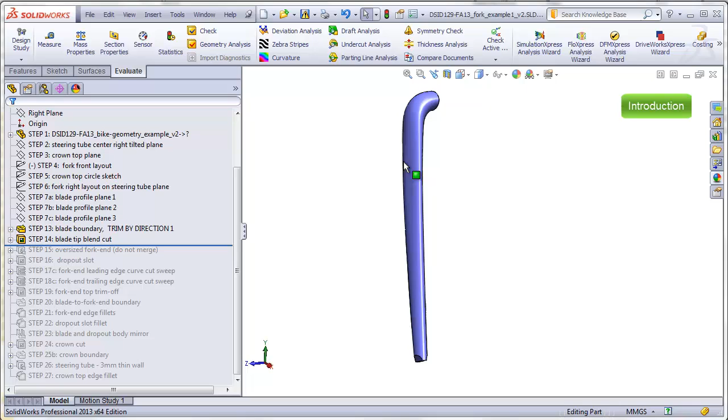At the end of part 5, we made it all the way to step 14, which gave us one blade made as a boundary and a trim at the bottom in order to allow us to add the fork dropout plate. In this video, I plan on finishing the entire fork by going through steps 15 through 27, which I'll just briefly walk through now.

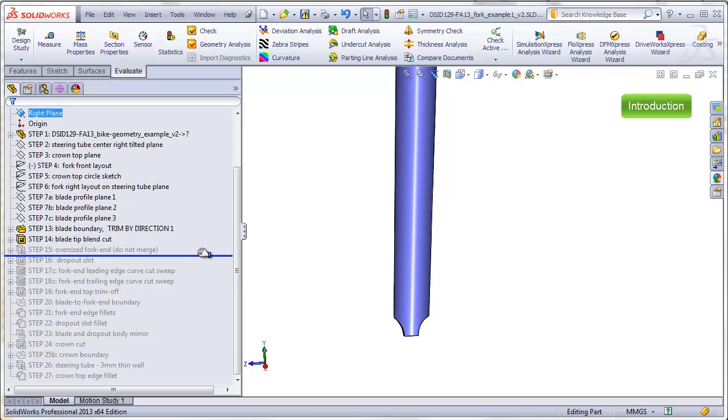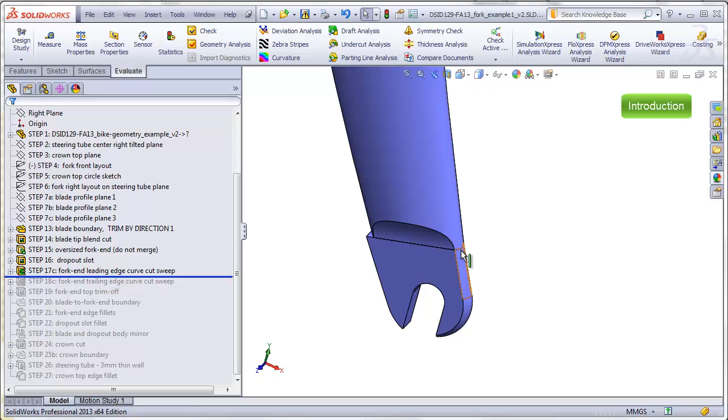Step 15 will be to add the actual dropout plate. We'll add it slightly oversized. We'll add the dropout slot itself. And then we're going to clean up the leading and trailing edge so that it matches the curvature of the blade. This will be done with a swept cut along the leading edge and a swept cut along the trailing edge.

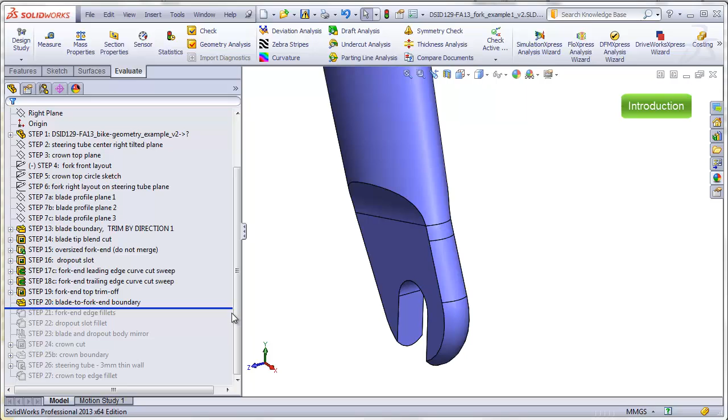These do not perfectly blend together yet, as we can see from the zebra stripes. So what we will do is cut out a little portion in between and then repatch this with a boundary that goes tangent to the surfaces above and below, giving us a nice blend.

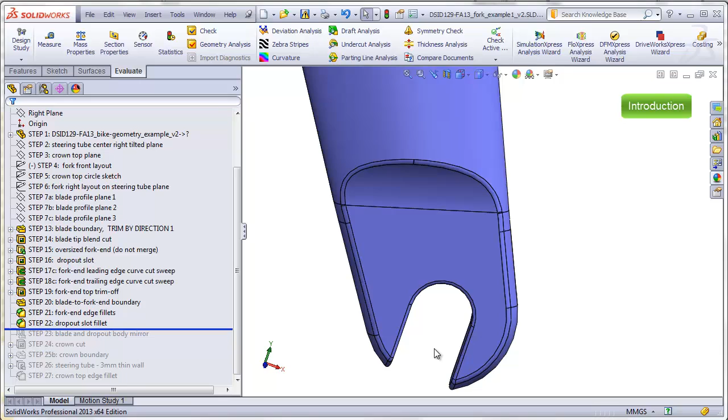We'll finish up the dropout with fillets along the edges and fillets along the dropout slot. That completes a blade with all the details for the dropout plate and slot, and we can finally mirror this entire assembly to the other side.

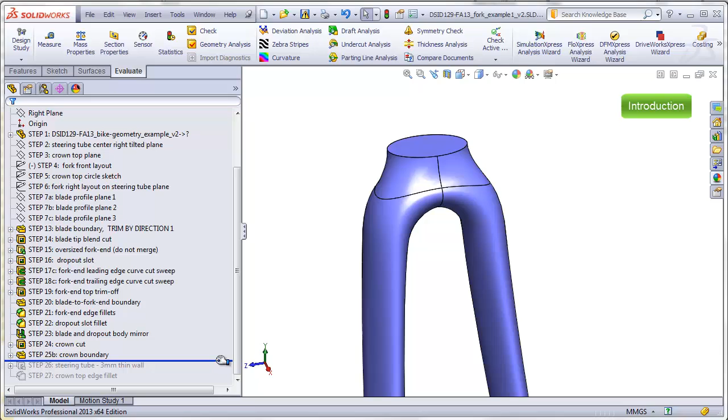Then it's time to add the crown. In this video, I'm going to cut the top of the blades off and then build a new boundary for the crown itself. Add the steering tube as a thin-walled extrusion, and then finish everything up with a fillet on the upper edge of the crown. So let's roll back to step 14 and then start constructing step 15.

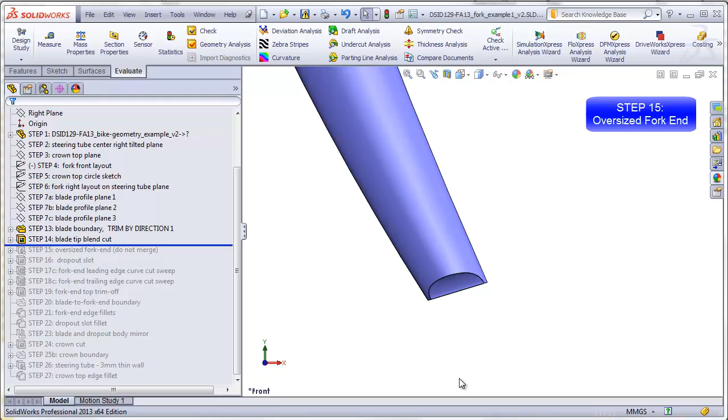What we are going to do is add our dropout plate, and we're going to add it a little bigger than it actually will be in the final design. I'm going to create a new sketch on my fork dropout plane, which is included in the inserted master file. So here's my fork dropout plane sketch, and I will make my front layout sketch visible.

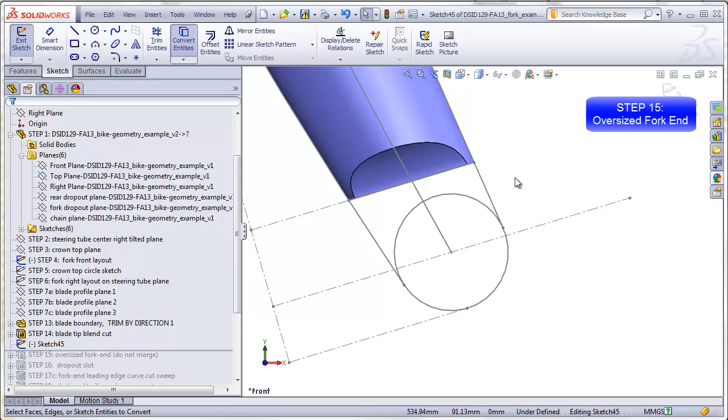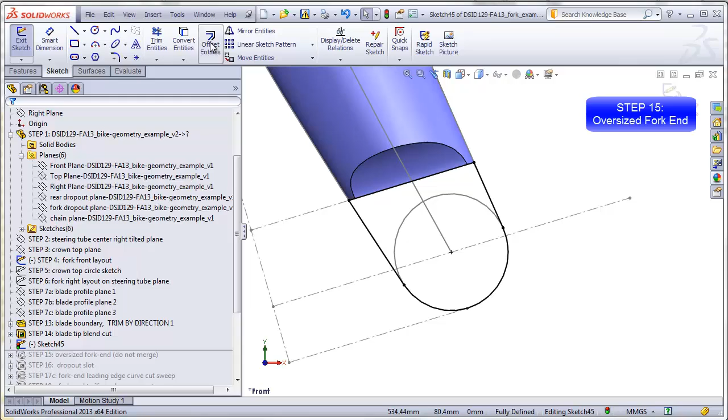What I want to do is copy these lines that represent the dropout plate using convert entities. And this one here. And we'll trim away the excess and this portion here. Now what I want to do is offset this edge a little bit to make the oversized dropout plate. So offsetting about 1 millimeter.

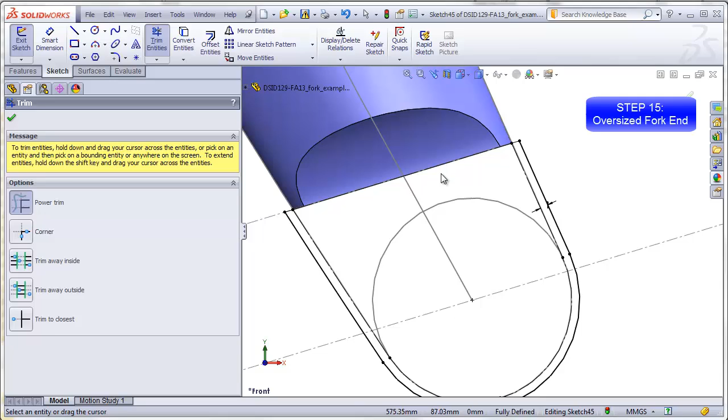I'll delete this line and I'll change all my original lines to construction, and I will extend this line out, trim this away, and actually this line should not have been construction, so I'll change that back to a solid line. So this will be the perimeter of my extrusion that will make the dropout plate.

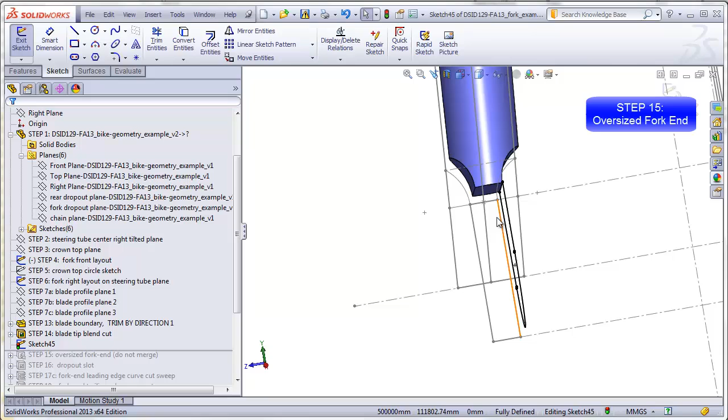I will also make my tilted sketch on the right tilted plane visible, so that I can see the thickness of my dropout plate. I can now do extrusion up to vertex. I can choose this vertex here, and that will give me a dropout plate that's exactly the width of the trimmed down portion of the blade. I'm going to leave this unmerged.

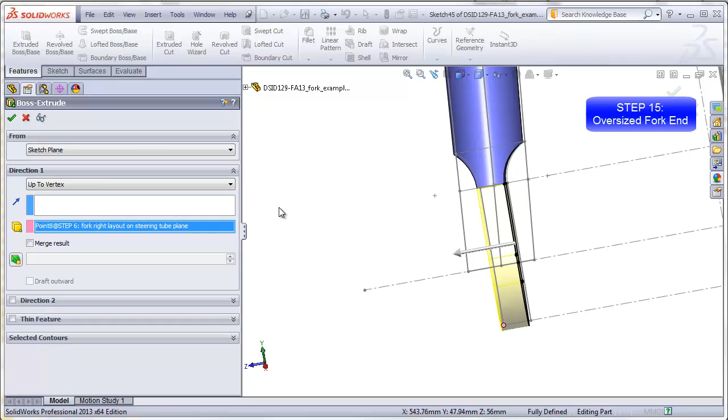The next step will be to add the dropout slot. In my sketches on the inserted master file, I have the fork dropout layout. I will make that visible. And once again, on my fork dropout plane, I'll make a new sketch. All I have to do is copy these lines that represent the slot and cut that out of the plate using convert entities.

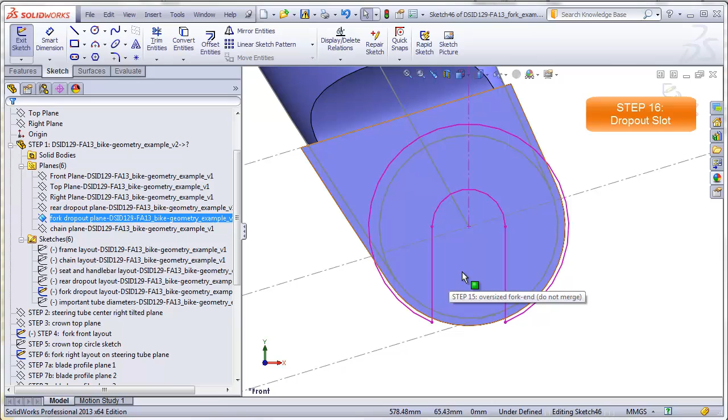Extruded cut, flip the direction, and make sure it's cutting through the correct body which will be this one here. And that completes the slot.

The next step is going to be to cut away this excess material along the edge of the dropout plate so that its contour, where it meets the blade, matches. I want to do that on the leading edge and on the trailing edge. This contour is probably not quite the same on the leading edge as it is on the trailing edge, so what I want to do is two separate swept cuts, each one starting at the top of the plate and finishing right in the open slot.

I don't want to do one single swept cut wrapping around the bottom and coming up to the top because it's almost guaranteed that it won't properly match the trailing edge of the blade. The first step in this process is going to be to make the sweep path.

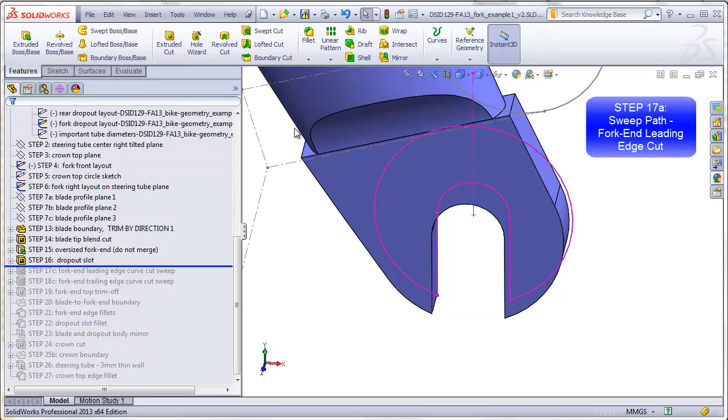So sketching once again the fork dropout plane, I'm going to copy these lines and this line to create a sweep path. Using convert entities, I'll copy this, this, and this. And I will add a construction line going from the center downward.

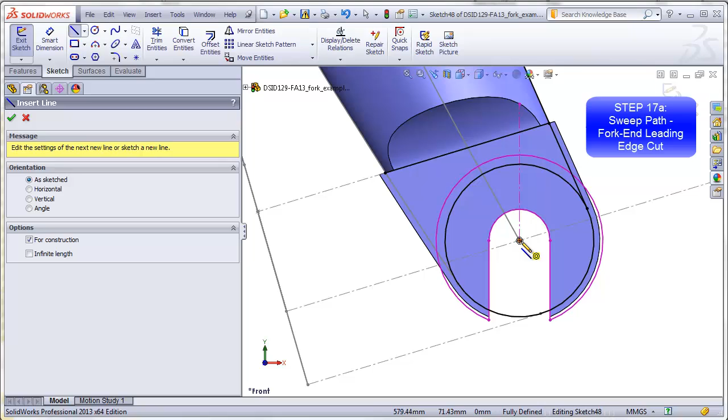And I will trim accordingly, getting rid of this excess here and this portion here. This portion I'll just make a construction line. So now I have a sweep path that starts at the top of the plate, wraps down around, and finishes right in the middle of the slot. Closing that sketch.

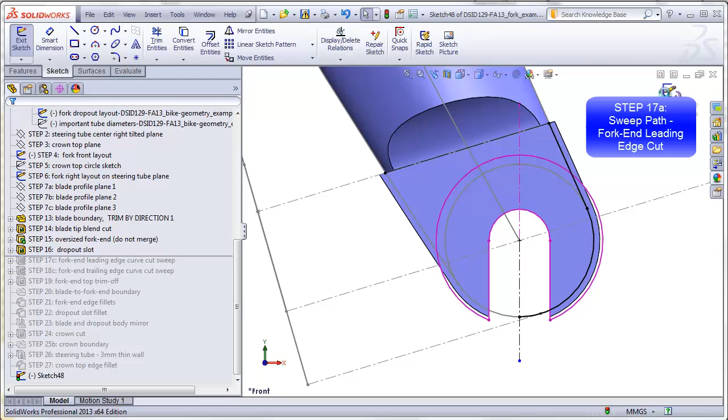It's time to draw the profile that will be swept, and I'll draw that on the top of the plate. What I want to do is copy this curved edge, and I will also copy this edge of the plate and this edge.

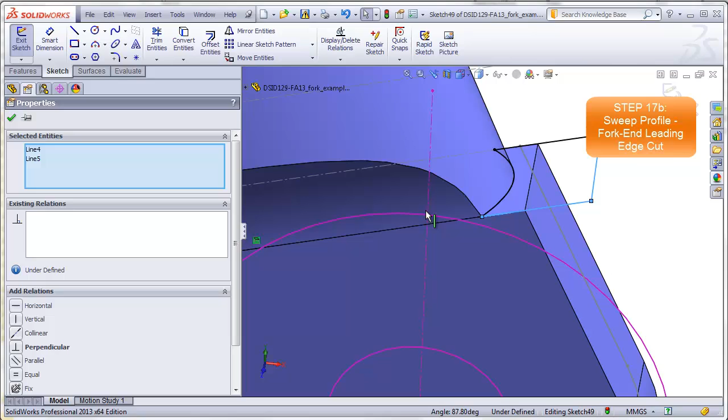Trim the excess. Looks like I didn't get this one here. Trim the excess, and I'll drag this out just a little bit and finish this enclosed area. Make these perpendicular. We see what's happening here is this is the widest point of the blade.

By adding a little extra to the dropout plate, I'm guaranteeing that this profile, which is going to be swept around this area, will always be cutting into material. If I didn't oversize this plate, it's possible that this widest point, when trying to cut the widest point of the plate, would sometimes not give us a clean cut, and we would get a less than desirable result. Here we are guaranteeing that we are always cutting into material by making this a little bit oversized. So I'm going to add a dimension to this side here.

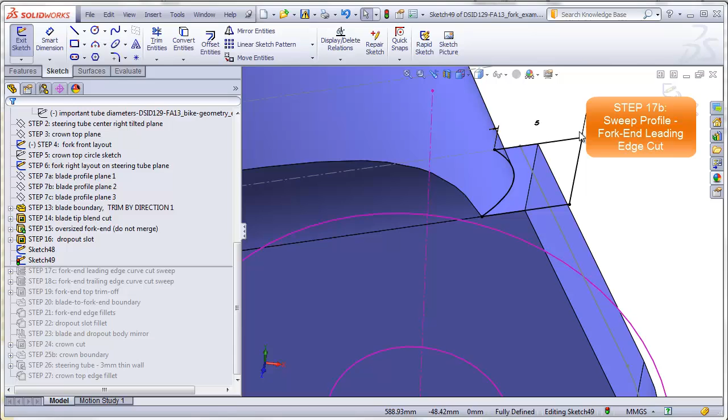Make that about 5 millimeters. The dimension isn't too important as long as it's not too large. If it's too large and you have a sweep path that curves inward before curving outward, the profile can end up crossing over itself and causing an error. So keep this down between 3 and 5 millimeters. So we'll finish that profile.

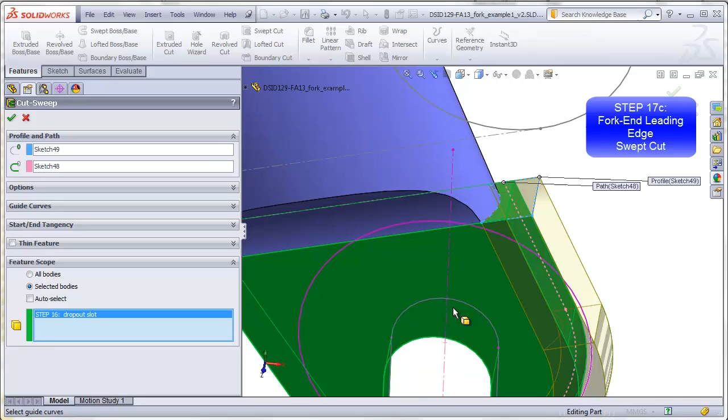We have our two sketches that we can make a swept cut. Going to Features, Swept Cut, choose our profile, our path. We want to make sure that this is the body that is cut. You can see in the highlight that this is ending right in the middle of the slot, so it won't be cutting any of the trailing edge.

And there's our finished cut. We can see that this matches up right at this edge. That completes step 17.

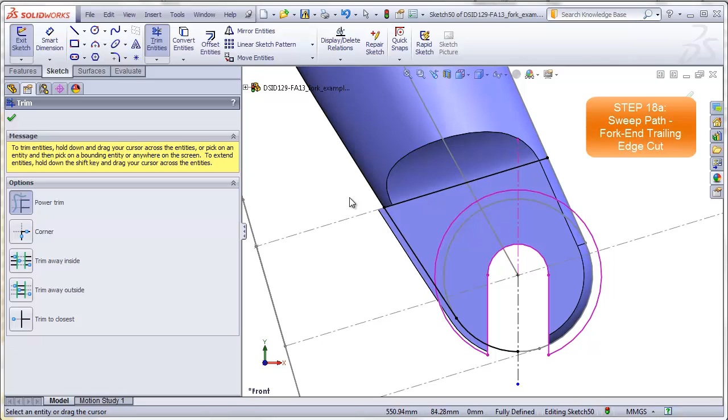For step 18, we will repeat the process for the trailing edge. So once again, making a new sketch on the fork dropout plane, I'm going to copy this line and this line using convert entities, and drawing a vertical center line from the center of the axle. That allows me to trim back this excess so that this path ends here, and trim away this excess here. Convert this to a construction line, and this gives us our path.

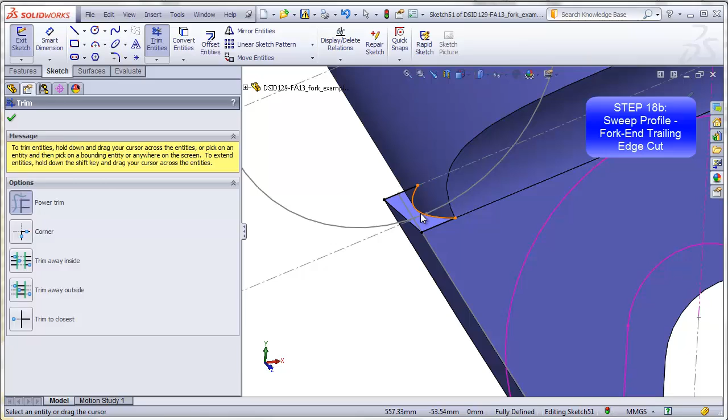To make the profile, we will sketch on the top of the plate, copy this edge using Convert Entities, and also copy these two edges. Trim away the excess so these lines end at these corners. Drag this out a little bit. Finish the enclosed area.

And make these perpendicular and add about a 5 millimeter dimension to this line. Finish the sketch.

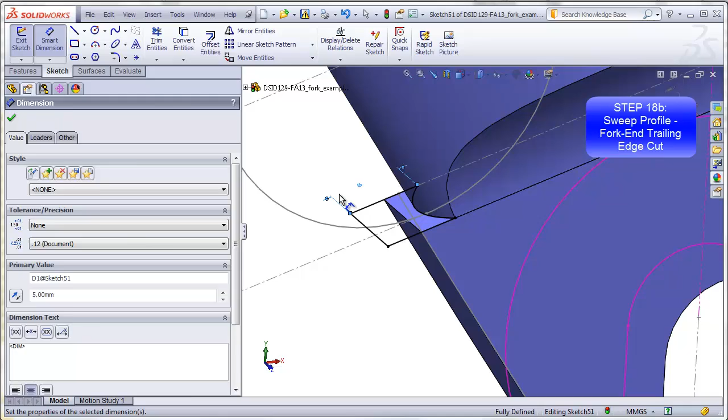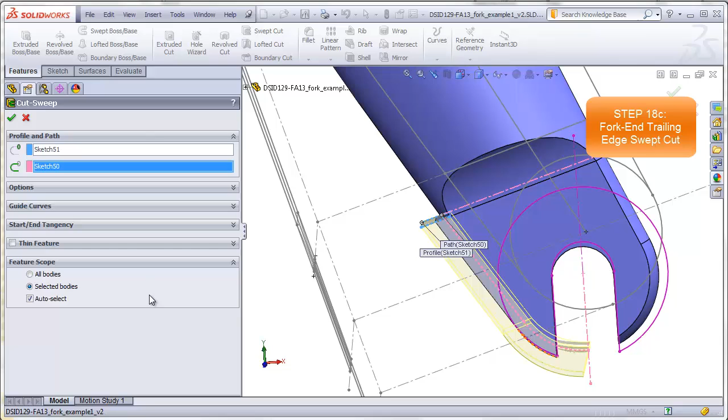Now we can do the swept cut once again. Choosing this as our profile, this is our path. You see once again it's going to end around the middle of the slot, and we will choose the plate in our feature scope. And we've just completed step 18.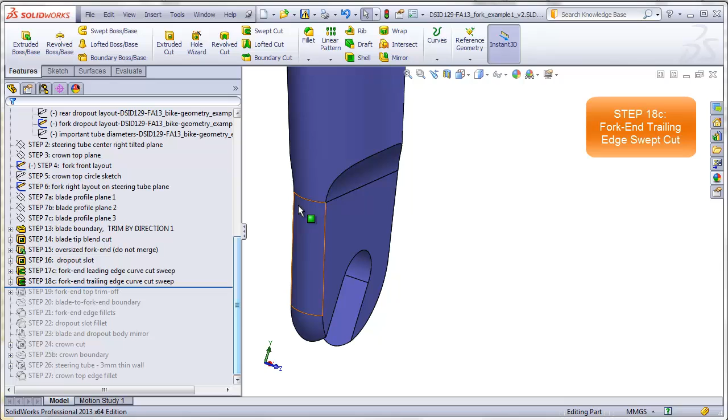So here we can see how this contour blends into the leading edge of the blade. This contour blends into the trailing edge. If we turn on our zebra stripes, we see that even though these match up, they aren't tangent to each other, so this isn't a nice smooth blend.

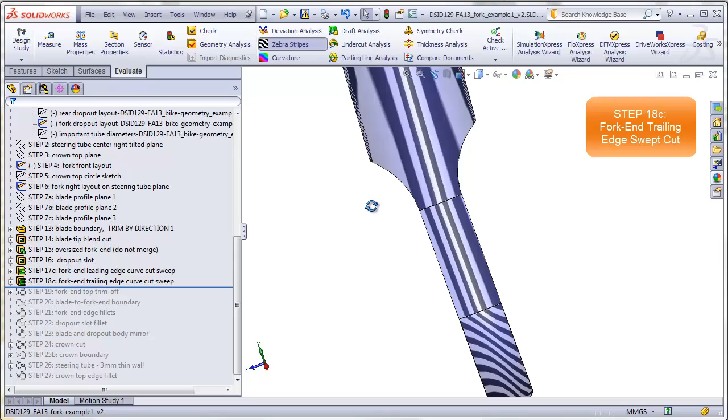The reason for that is that the plate is going straight up and down, but the blade immediately changes directions and is angling inward. What we're going to do is cheat a little bit, take out a little piece of the plate, and then blend it back together using a boundary. Making my sketches visible again, and once again drawing on the dropout plane.

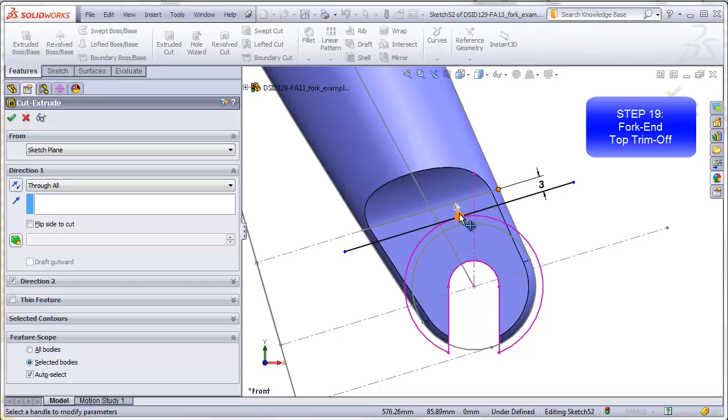I will draw a line that is parallel to this line sketched in the layout sketch, and I will make that about 3 millimeters. We're going to cut the top 3 millimeters off of the dropout plate. Extruded cut, make sure it's going this way. Select the plate, and that creates a gap between the plate and the end of the blade.

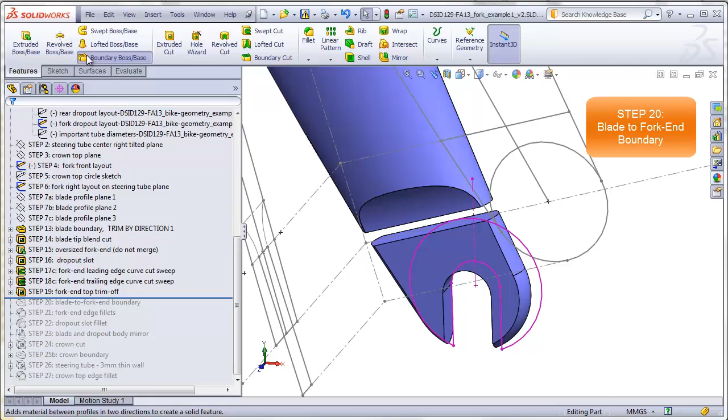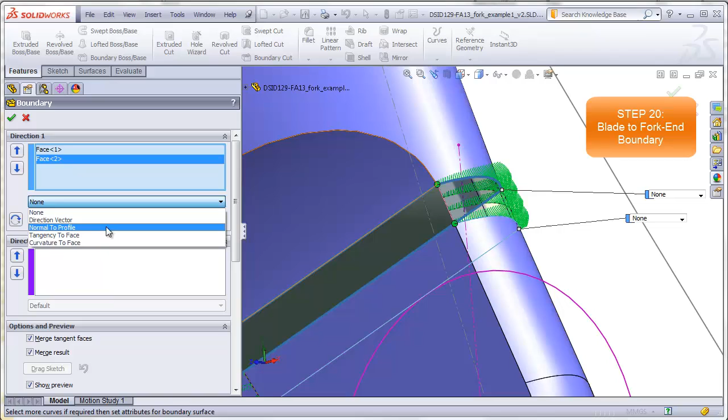Step 20 is to build a bridge now that spans this gap using our boundary. We'll click on this face, I'll do it near this corner. And I will click on this face and try to click near this same analogous corner so that these link up properly when I make the boundary. What I want to do is set both faces to tangency to face. What that will do is make all of these outside surfaces of the boundary tangent to all the surrounding surfaces that it connects to.

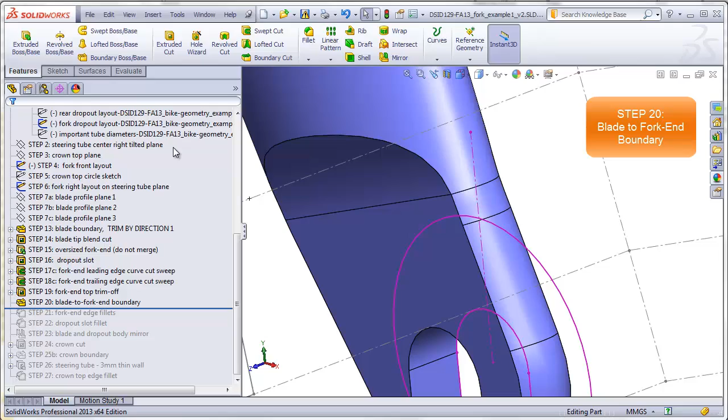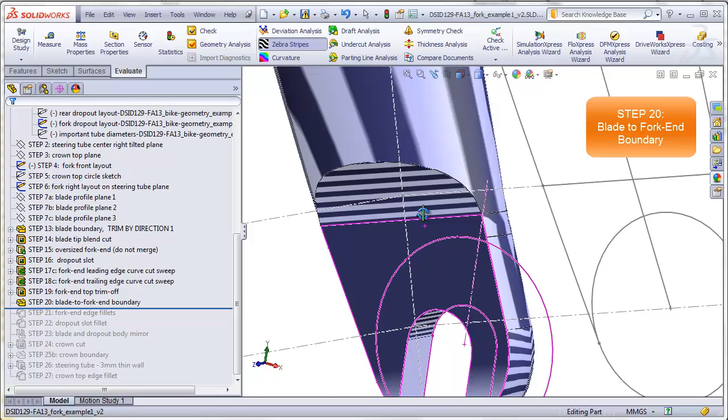So now if I turn on zebra stripes one more time, I see that that little patch has created a nice blend between this portion and this portion. We see the zebra stripes connect together. We also see that this patch is still perfectly flat in this zone, and this flat area is going tangent to this trimmed down area.

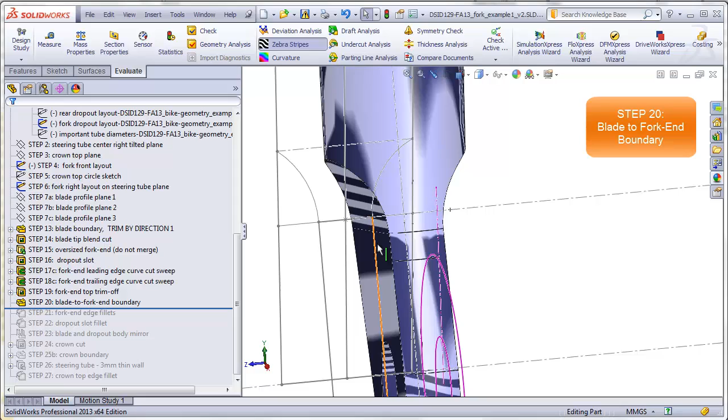It's important that you've drawn your tilted right layout sketch so that this trimmed down area was going tangent to the straight line that represents the dropout plate. If it's not, when you try to put this patch in, you won't be able to get this boundary to go tangent to this portion.

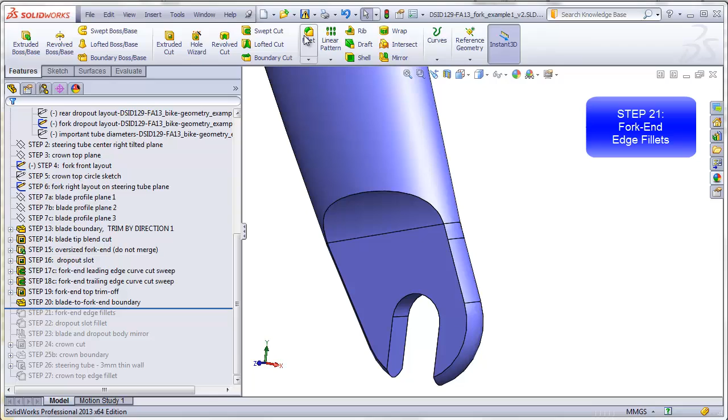The next step is to put some fillets on these sharp edges. I'm going to put some 1 millimeter fillets going around this perimeter on both sides. And if I'm lucky, I can just click on one edge, and the fillet will follow all along the tangent edges. If you can't get it to completely go around the perimeter, try clicking on more than one edge to force it to wrap its way around. So this is the front side, this is the back side. We got lucky this time.

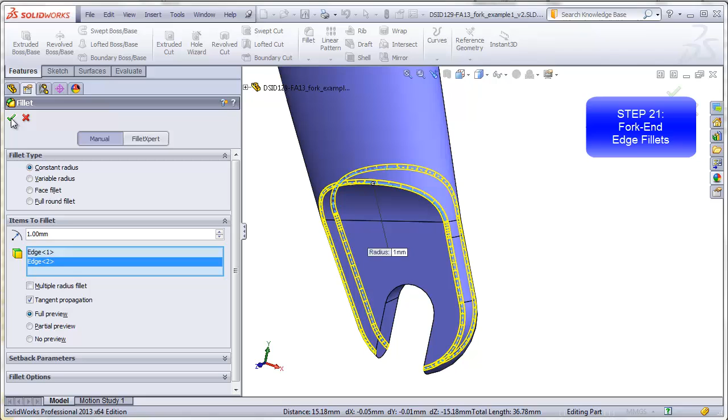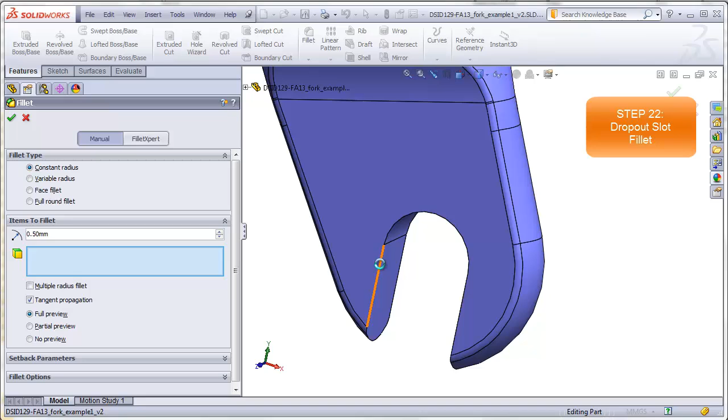Now what I want to do is add a small fillet that's going to run around the perimeter of the slot. Because we added these fillets along the edges, this has become one contiguous perimeter that will run from the outside of the plate all the way to the inside. I'm just going to put in a 1/2 millimeter fillet, and I should just be able to click on one edge. We see that that wraps its way all around automatically. Again, if you can't get it to wrap automatically, try to click on some additional edges.

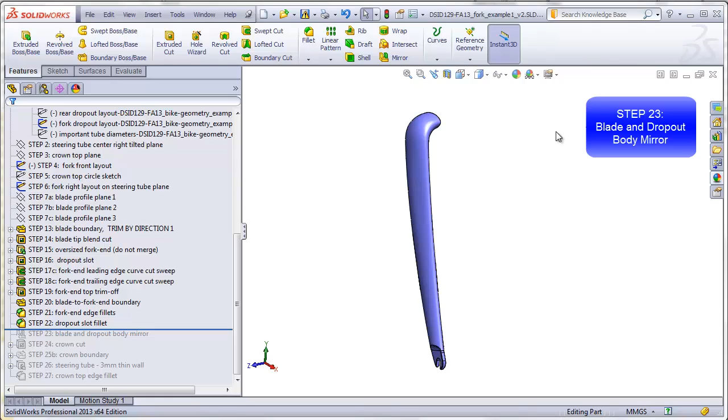So we just completed the entire blade and the attached dropout plate with slot. The next obvious step is to mirror all of the work that we've done. So choosing mirror and our front plane, we're going to use the bodies option and mirror the entire blade with the dropout. Now we have something that's starting to look like a fork.

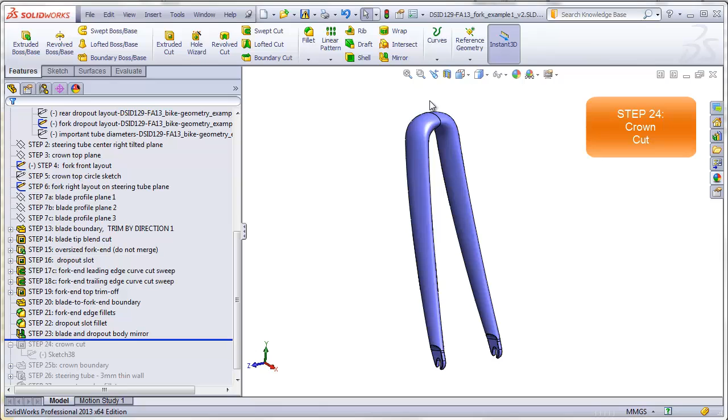So now we're just 4 steps away from completing this. We still have to add the crown and the steering tube. To add the crown, I'm going to cut away a portion of the top of the blades and then blend a nice crown into this cut-off section. The cut-off area will look something like this, and I'll show you how I made that.

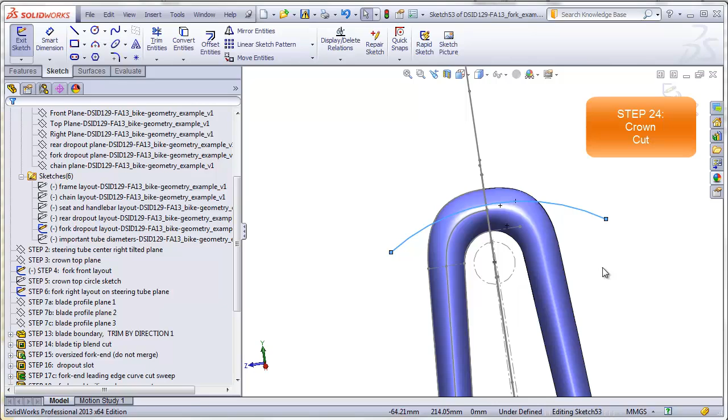Turning my sketches back on and sketching on my tilted right plane, I'm going to just do something simple like draw an arc, and I did this mainly through experimentation. And I'll draw a center line coming down coincident to the arc, and I'll make this center line coincident with the steering axis, collinear actually, and I will make the center of the arc coincident with this construction line that I made, so that the arc is symmetrical on both sides of my mirror plane.

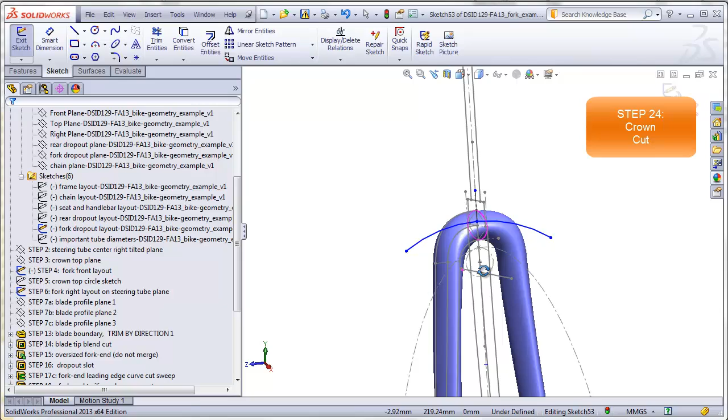Now it's a matter of just deciding how far down do I want this cut to be and what sort of a radius. I ended up making the cut come about 9 millimeters from the top of the blade, which is also the same as the top of the diamond in this view.

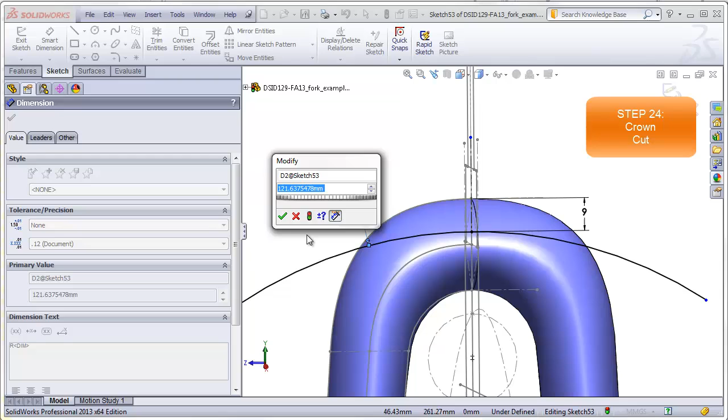I gave the arc a 100 millimeter radius. Again, I did this through experimentation, just deciding what looked good to me, and you might come up with a completely different shape and different dimensions. Then I simply extruded that cut, flipped to the other side.

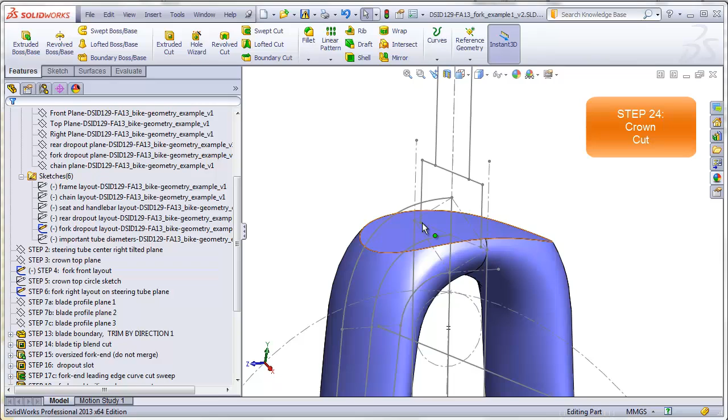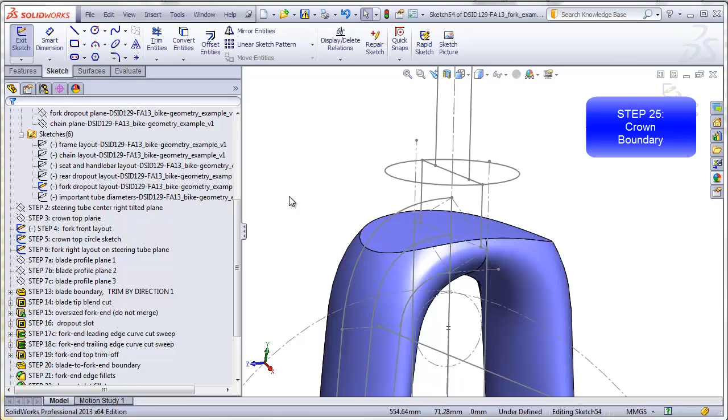This leaves a zone here that I can blend the crown into. The top of the crown is here. Remember that we put a plane going through there, the crown top plane, so I'll sketch on here. I also had drawn a little circle representing the top of the crown, so I'll make that visible and convert entities on it. That gives me the top profile for the crown. Let me hide the circle that was in the crown layout sketch.

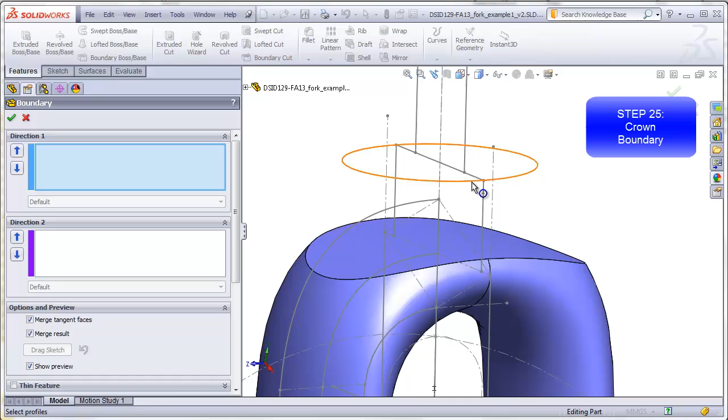Now it's time to make a boundary, going from the circle we just copied down to this surface. I'll click near the center here, and click this surface near the same center. Now it's going to bridge from a sketch to a surface. Right now these aren't blended together very nicely, so where it says 'face' in direction 1, I'll change that to tangency to face. Now the boundary curves and meets the surrounding surfaces of the blade to blend smoothly.

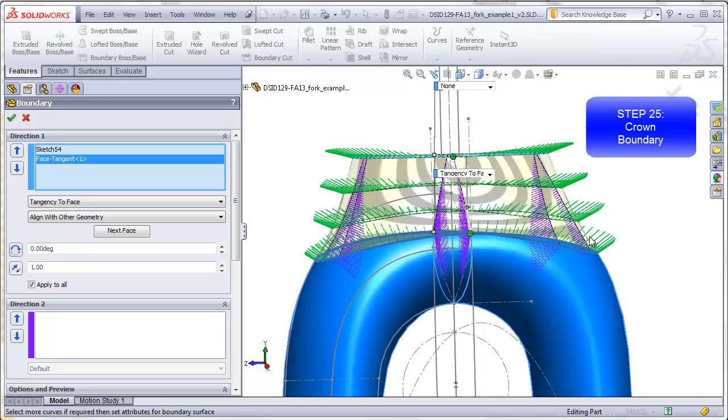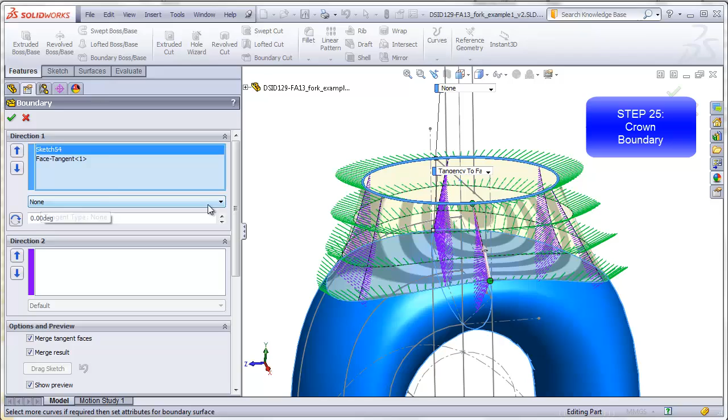But up here is where the head tube of the frame is going to be. We want the crown to curve and blend nicely into that head tube. Since the head tube is probably going to be a simple extruded circle, we want to make sure the boundary goes in the same direction as that extrusion right where it meets it. So in the sketch, direction 1, I'll change from none to normal to profile, so that when this is assembled with the frame, and here's where our head tube is going to be, the direction of the boundary and the direction of the head tube will be the same to create a nice blend, even though they are actually separate parts.

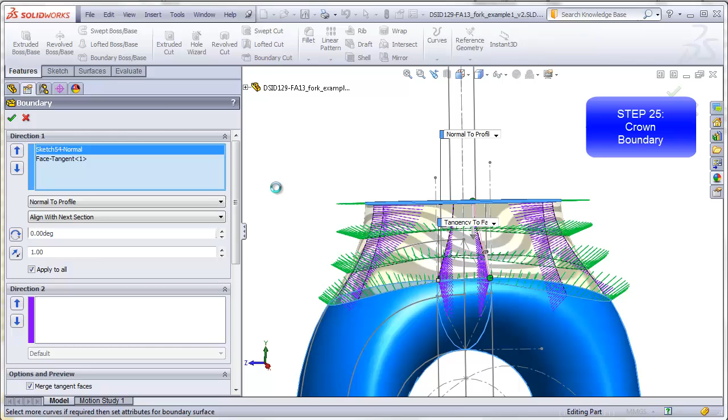Finishing that, and if we check this out with our zebra stripes, you see how the crown is smoothly blending into the blades.

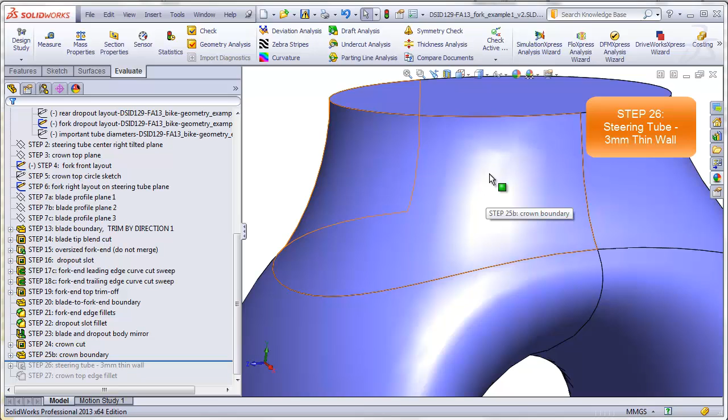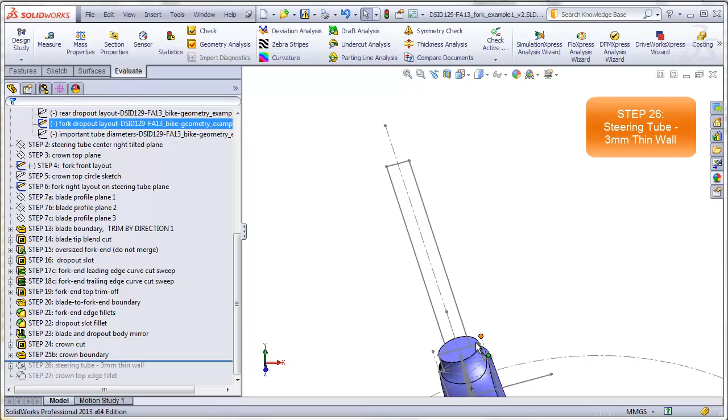Our second to last step is going to be to add the steering tube. Turning on our sketches again, you have a choice on how to do this. We could just copy the center axis and this line into a new sketch and revolve around the axis, or we can draw a sketch on the top face of the crown and extrude a tube up to either of these vertexes. I'm going to draw a sketch on the top here.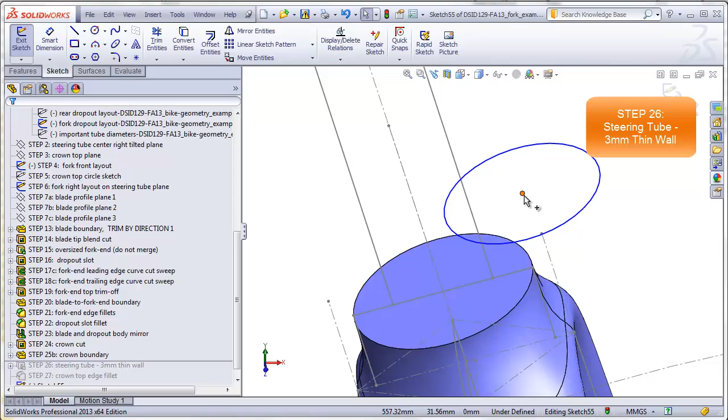Draw a circle, and it will pierce the center of the circle to this line here, and make a coincident relation between the circle and this point. Now I can extrude this circle up to either of these vertices.

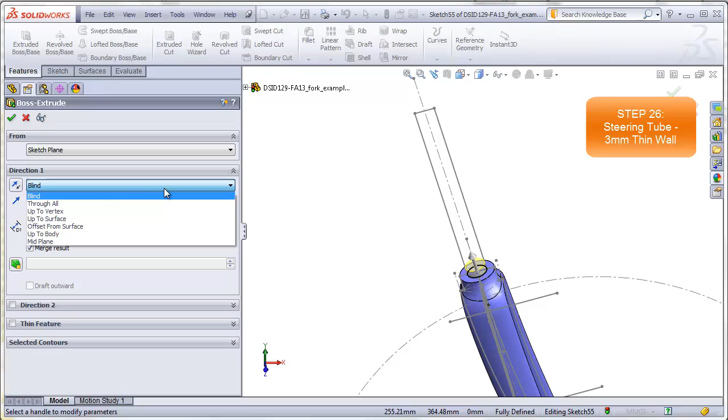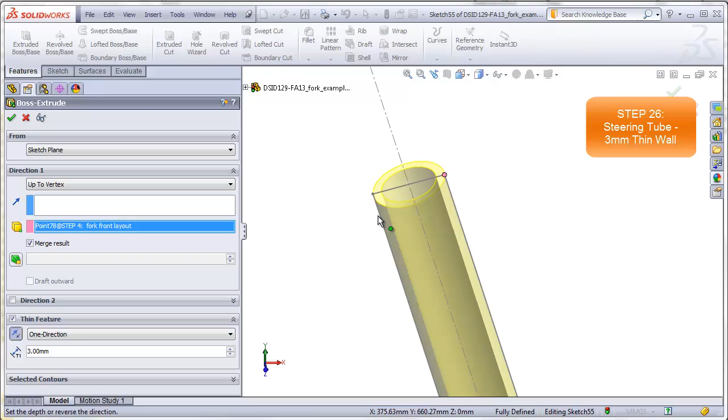I want to make this a thin wall extrusion, so activate thin feature, make that 3. You'll notice right now that it's adding the thickness to the outside of the circle. I want to make sure I add it to the inside, so I'll toggle the direction—if we go the wrong way, we'll have a tube that's too large. So there's my steering tube, complete that.

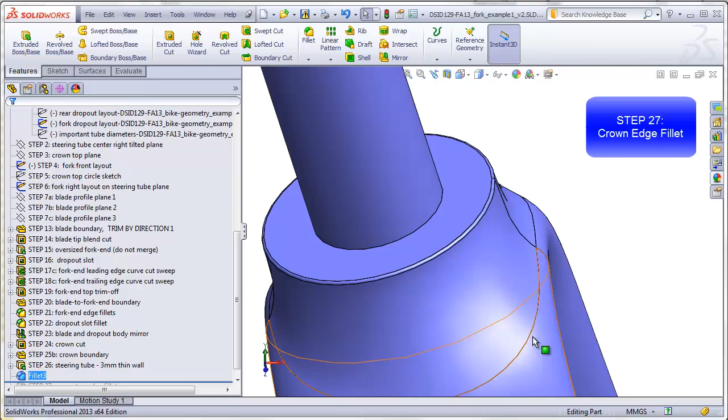My last step is to go back to the crown and put a little bit of a radius along this edge—a half millimeter should do it. And that completes all the steps for our bicycle fork.

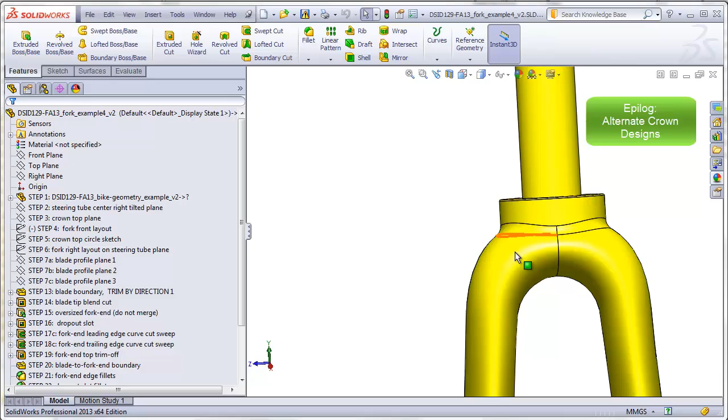I'll just mention that we don't have to build a crown exactly the way I did. It depends on the style you want. This is a very blended sort of design. You can always do a crown that's nothing more than a simple revolved cylinder blending into the blades with a nice big fillet at the intersection. Or you can try something like this, where once again the crown is a boundary, but it's intentionally not blending into the blades—instead it's going in this direction to match perfectly with the head tube of the frame.

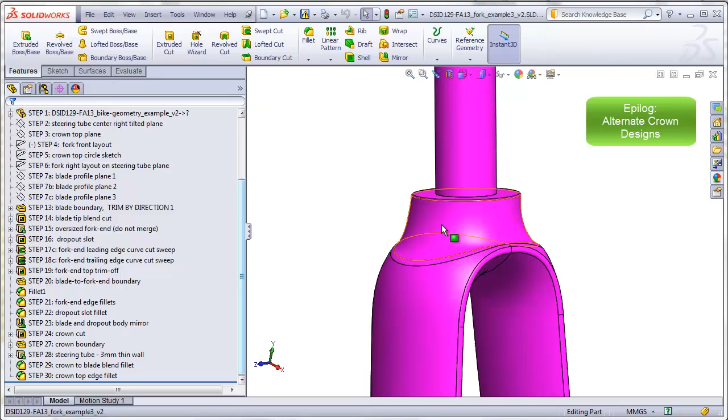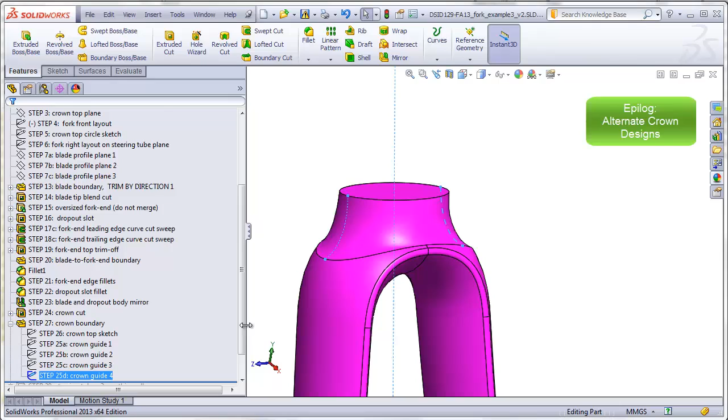In this case, I made the boundary similar to the way I made it before, starting out with a sketch up here and a boundary going down to the surface. But I also added some guide curves that control the shape of the boundary as it goes down to the blade. Then I added a nice fillet here to blend this shape into the blade itself.

Of course, you're not limited to just these three options—there are other shapes I'm sure you can come up with. So that completes this video series for the bicycle fork.